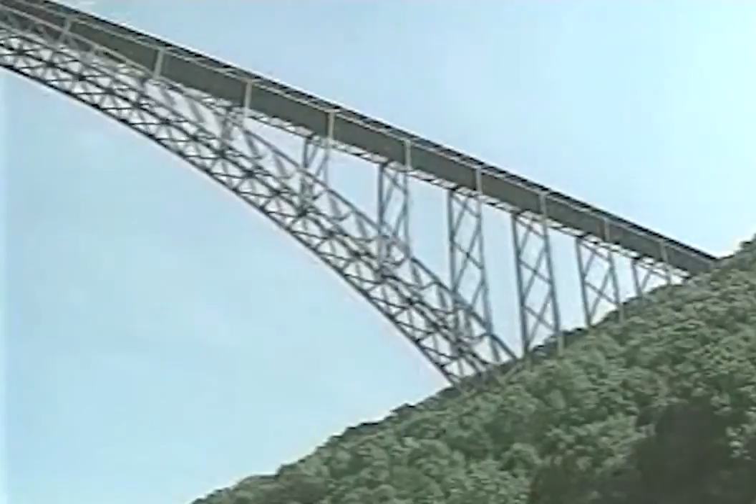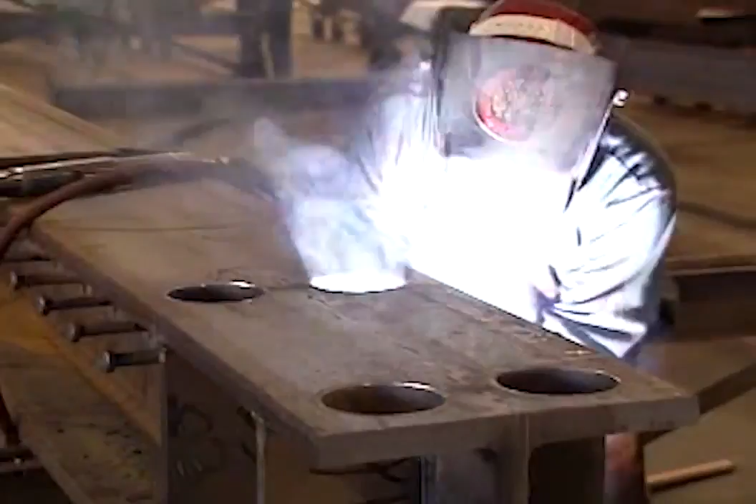After the steel has been produced, every piece of steel in a skyscraper or bridge must be precisely cut, its holes properly placed, its pieces welded in exactly the right location. Every single bolt in the structure must be located and attached at the proper place, and all this must be exact to 1/16 of an inch, so that the steel members will fit together perfectly at the site.

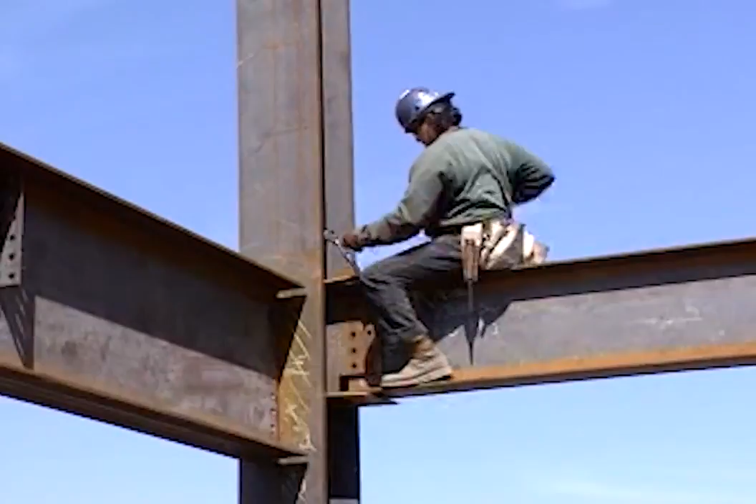That's why a process called detailing is such an important and integral part of building today's complex steel-based structures. It is the detailer who must develop drawings that are so precise that they will show the fabricator the exact dimensions required for manufacturing the finished steel components that will go into the structure.

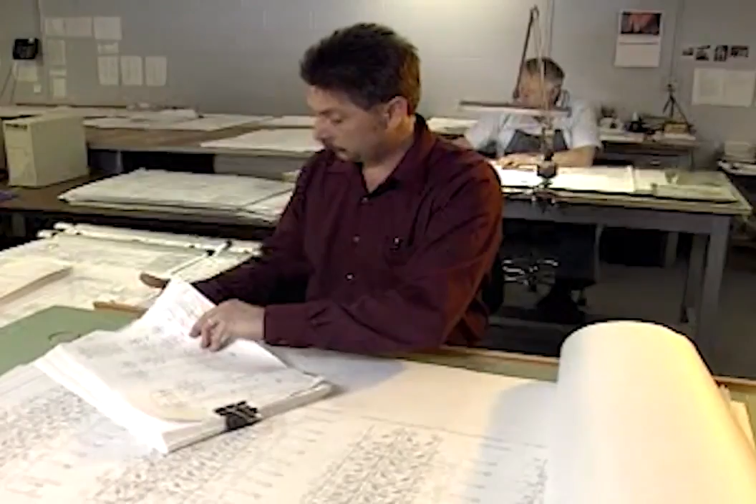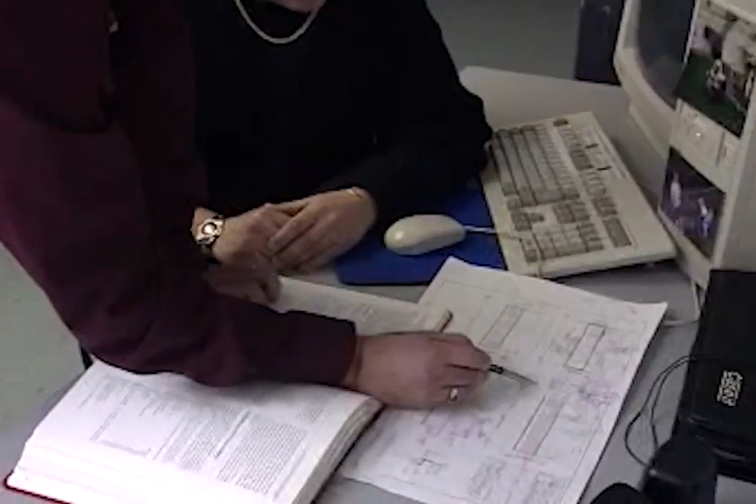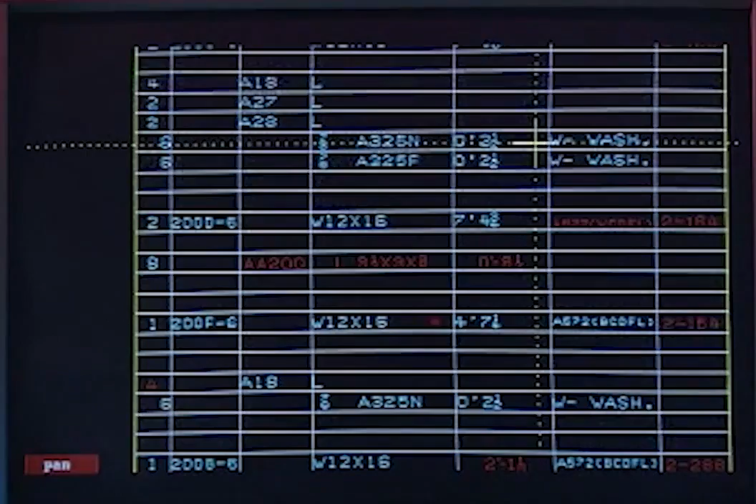To accomplish this formidable task, the detailer will take the design prepared by the structural engineer and, on paper, build a 2-dimension or a 3D model of the steel frame of the building or bridge. It is from this model that the detailer will generate a complete list of every member in the structure, as well as shop drawings for all the individual steel pieces.

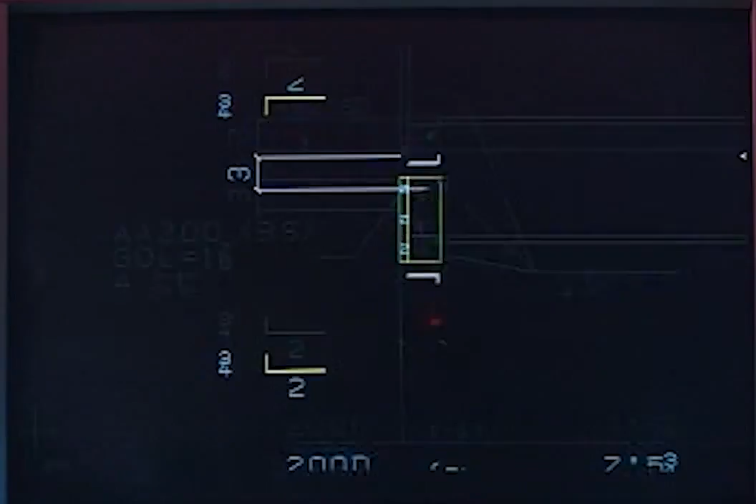To accomplish this process, the detailer must compute the length of the beams and columns, as well as the bolts and raw material to be used. The detailer must also keep track of every hole in the entire structure.

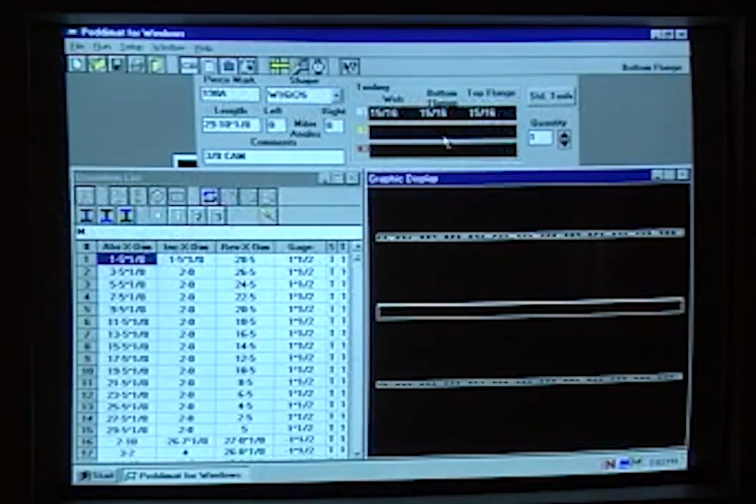If a change is made in a beam connection or in the hole of one column web, it will be up to the detailer to indicate exactly how that change will affect all the holes in those beams. In addition, if a member has been changed on the shop drawing, the detailer must also change the erection drawings that will be used in the field.

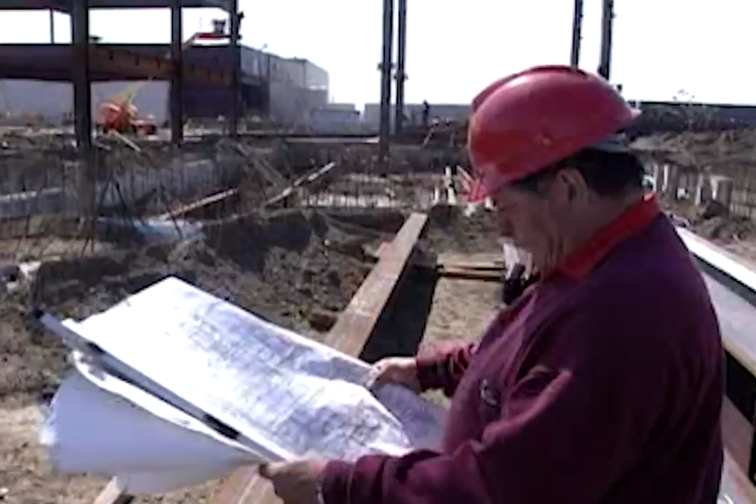All this information is developed with the help of computers, and it can be downloaded to the drill line in the shop or to the angle master to show them how to drill holes for the angles.

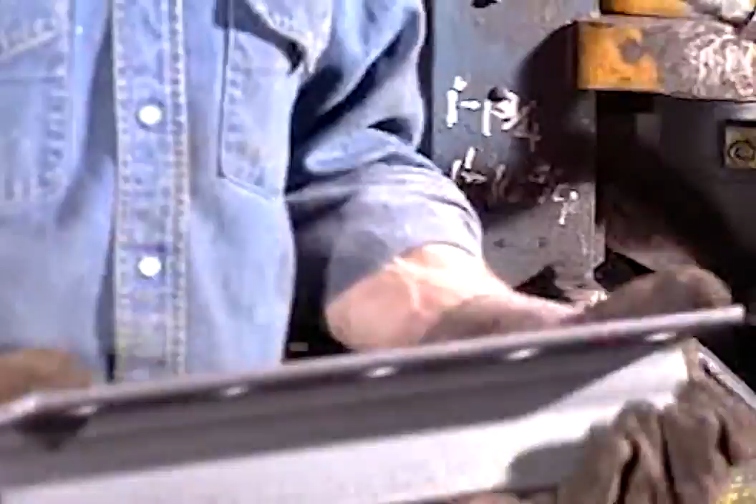But it's important to realize that although these critical tasks are done with the assistance of a computer, they are not done by the computer. The detailer's training, skill, and expertise is the key to the process.

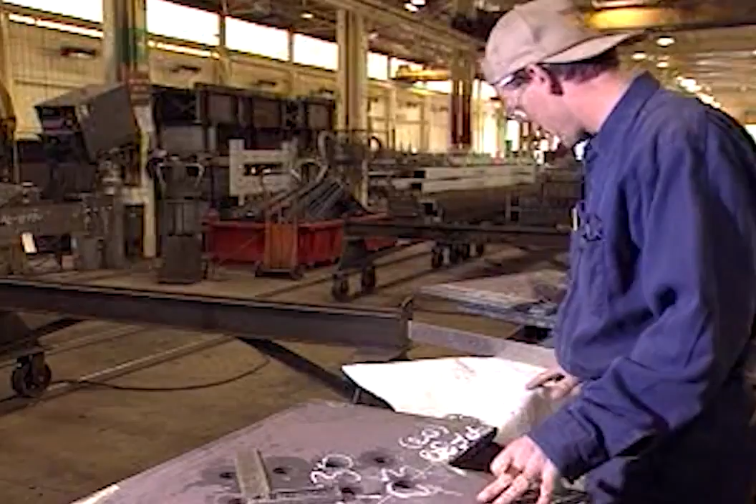It is the detailer's ability to translate the engineering drawings of a large structure for the fabricator so that the fabrication shop will know exactly what must be done to prepare the steel.

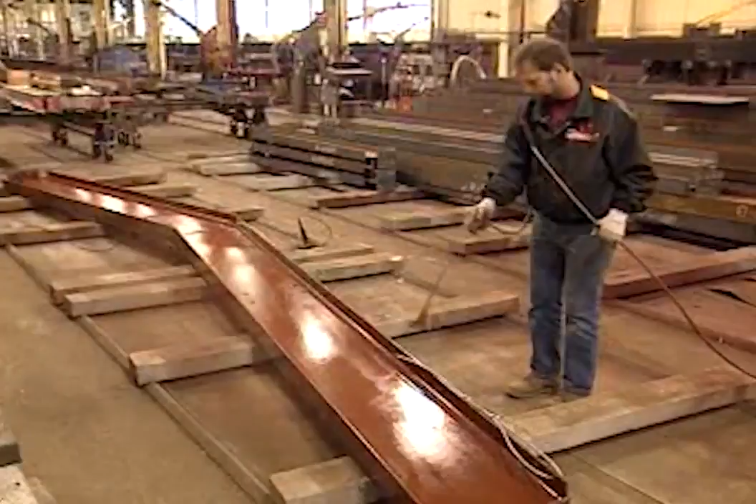The detailer will also indicate the preparation, cleaning, and painting of the materials depending on its specification. If that weren't enough, the detailer may also have to consider and take into account shipping requirements, sometimes even the cranes that will be used in the field, and how those cranes will load and unload members from the truck.

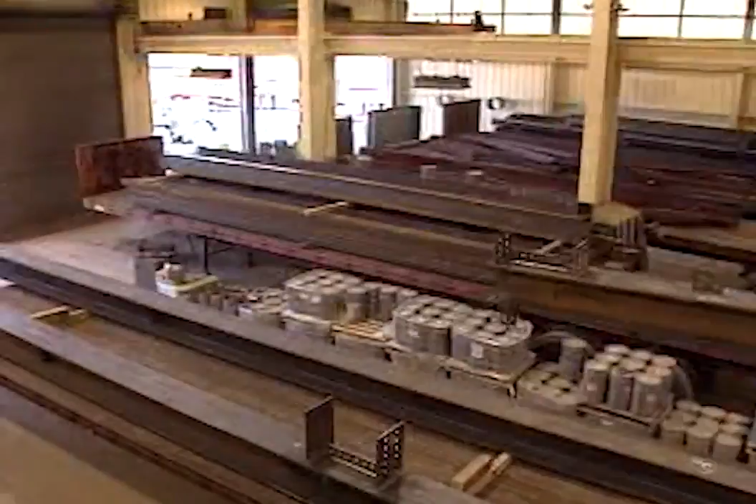Before the fabrication shop actually drills and cuts the steel members, the detailer must submit his shop drawings to the engineer of record for approval to make sure that the shop drawings are fully compliant with the engineer's design.

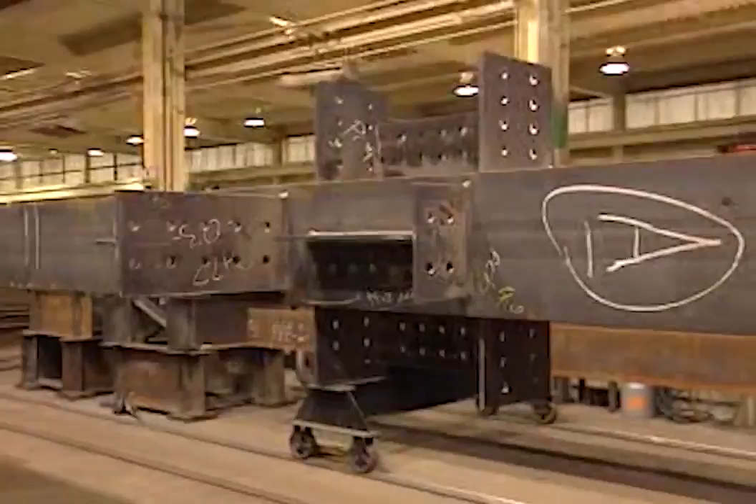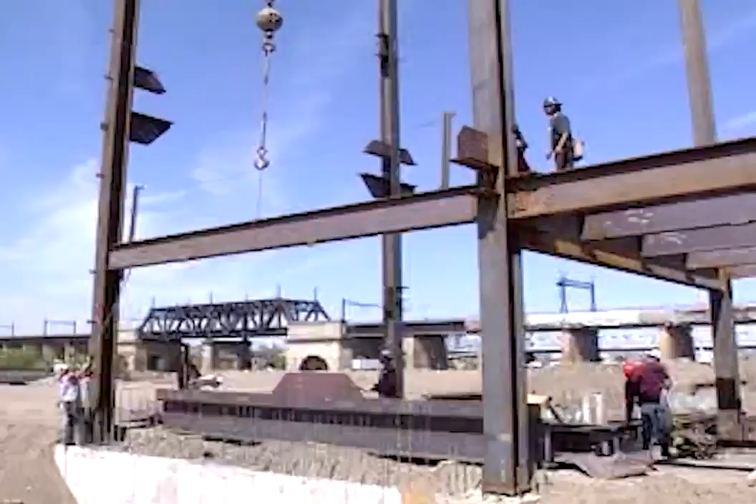It's clear that steel fabrication plays an important role in joining steel members, even before the beams and girders arrive at the construction site. This is one reason why on-site building with steel is so much faster than is possible with other materials. At the fabrication shop, the steel is cut, punched, and pre-assembled as much as possible according to the detailer's drawings.

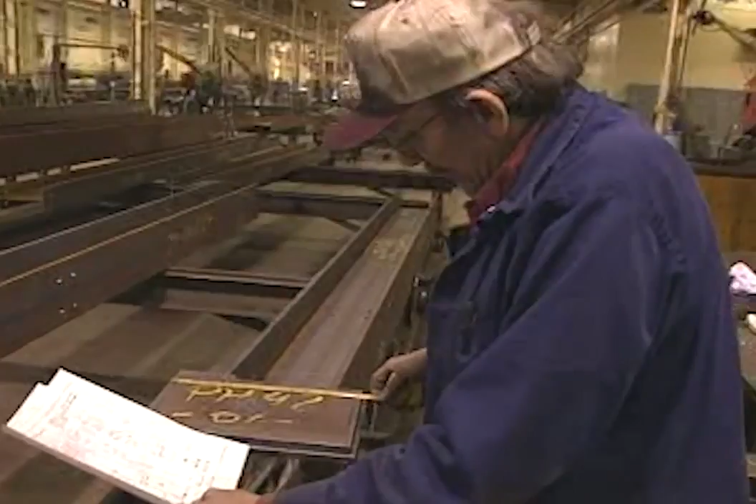These drawings can be used to generate computer disks that will drive the shop's fabricating machinery to cut and drill the steel with absolute precision.

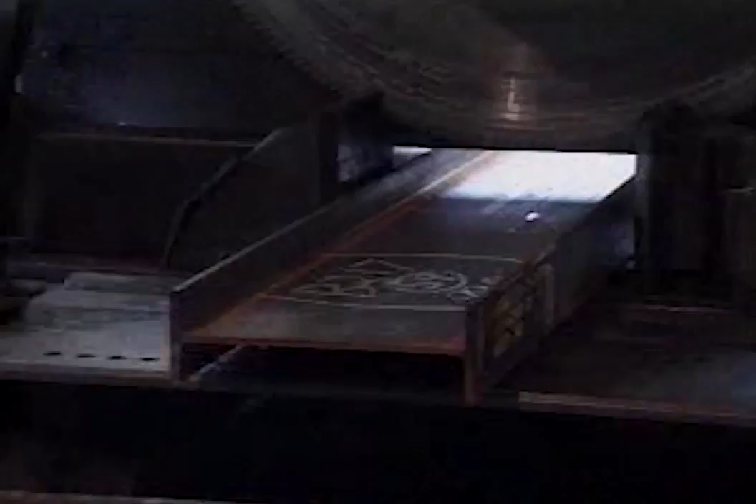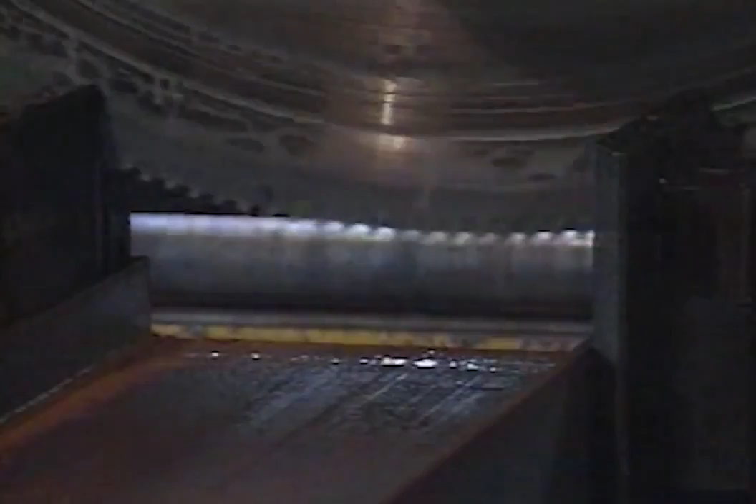If cutting is necessary, the operator inputs the size and the desired length of the member. The stock lengths of steel will enter the cutting machine by conveyor. An automatic arm stops the stock at exactly the right point, and the blade cuts the steel. The piece will then be labeled and rolled out.

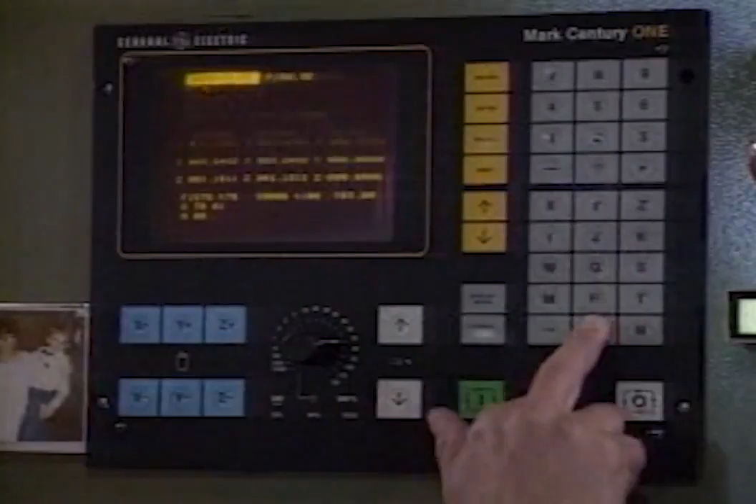From the cutting area, the steel members will travel on a conveyor to the next station, where holes will be drilled to make the bolted connections. Here again, these critical processes are precision controlled by computer.